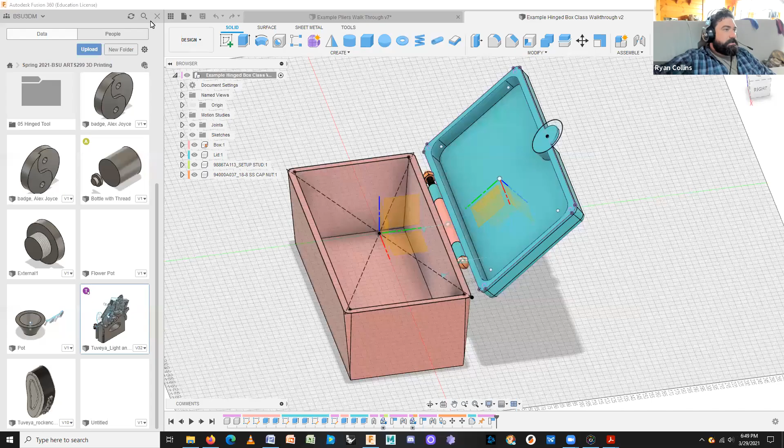Okay, so just to go over our other option for this assignment: a multiple component utility project with a hinge and imported hardware. The other option is making some sort of lidded container. It doesn't specifically have to be a hinged rotating container, nor does it only have to have one lid. You can go willy-nilly with that. But the two parts must be linked together with a joint operation, that could be a rigid joint. You want to play around with the other ones, go nuts. This is the previous example model I have, and I left it in the open position here.

So you can grab the lid, select it, and drag it. Why isn't it letting me do it now? There we are. Click and hold, and you're able to open and close it up to the limit, which I set to 180 degrees.

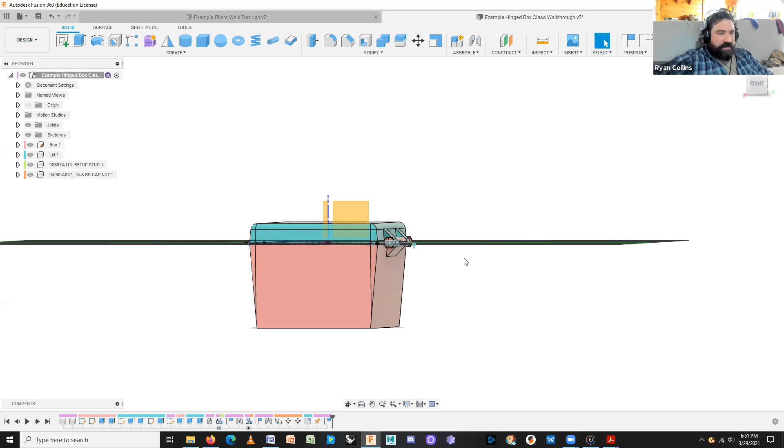Revert position. Now, one of the things I did on this is what we're going to go over: it doesn't just snap together. If I zoom in, I've created a hinge itself on there, which connects with two offset parts. If you look at opening a door in your dorm, apartment, house, whatever, there's some sort of a hinge involved, it's not just connected.

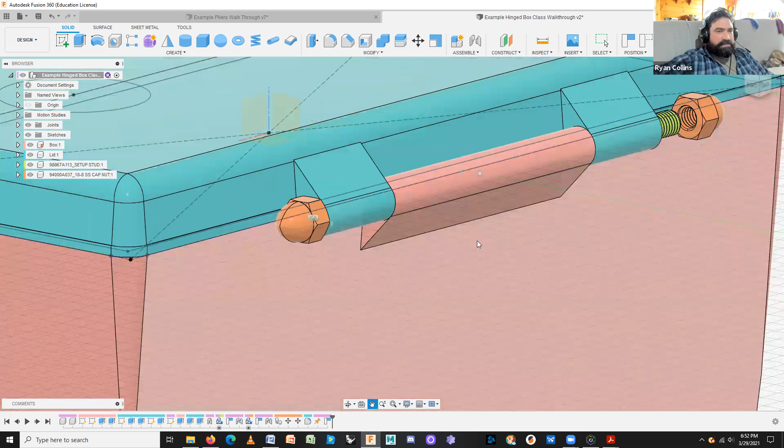And this has a hole through the hinge. Let me hide the two parts. If I zoom in here, it has a hole straight through that I imported a threaded rod from McMaster-Carr. So that threaded rod goes all the way through, and then I imported a couple of nuts on either end. Are these strictly necessary? No. Do they look neat? Yeah.

But I made some modifications to this, like I made this little thumb tab here. I created the top and bottom through Extrude tools, and I added a taper onto that, that's why it has the taper. So I'm going to show you how to model a box, basically it's two boxes, one on top of the other, and how to play around with some of the different features, like adding thumb tabs or things like that, but also how to go about modeling a hinge.

So I'm going to revert that, let that snap back to the open position. And there we are. Hooray for fun stuff. So start a new project, and since we're going to get after this pretty quick, make sure to save it. So, example: hinge lid box.

Now I told you it needs to have a specific dimension, or rather, intentionally contain something. Looking at my desk, we'll say it's a pen holder, works for me. So like we started last class when I was modeling the pair of pliers, I'm going to do the same thing in starting a sketch that will be my reference sketch.

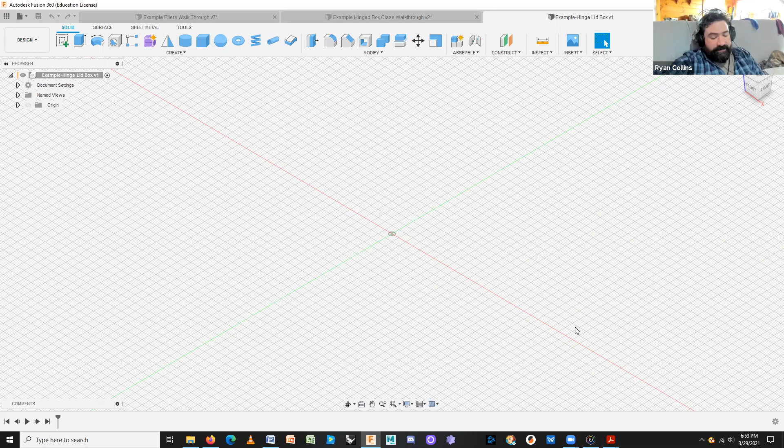So rather than making a sketch itself, I'm just going to make a quick model of a pen, which in this case will simply be a cylinder. This is roughly, alright, 150 millimeters long and roughly 10 millimeters in diameter. Since our workspace right now is still the solids workspace, I can create a cylinder, and I want it to look like it's just laying over, so I'm going to actually use the XZ axis, like the flat wall working in front of me.

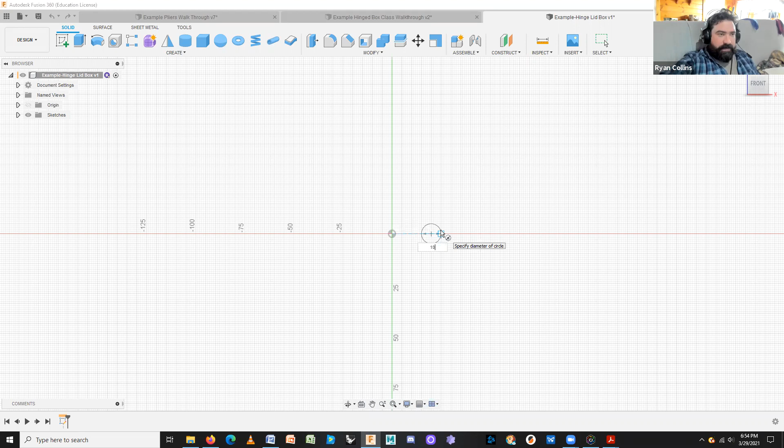To do that, I'm going to move over, and I won't put this right in the center, just move it over somewhere else, making a cylinder. So basically what I'm doing is skipping a step. If I was to make this with circles and then extrude it, I'd get the same effect. So, yep, I want that to be 10 millimeters in diameter, and in length I want it to be 150. This is one of the options for a cylinder, it just makes you go one direction. That's fine. So that's just going to be my reference component or reference object.

I want to have a pen. Now, because I do want it to be, I'm going to be building this in the center, I'm going to move this object to the middle here. So bring up my move tool, select body. Now that's going to give me some weird or strange measurements. I'm just going to drag this over. Now, I can just drag this, kind of eyeball it in place, but I know it's 150 millimeters, so I can just move it.

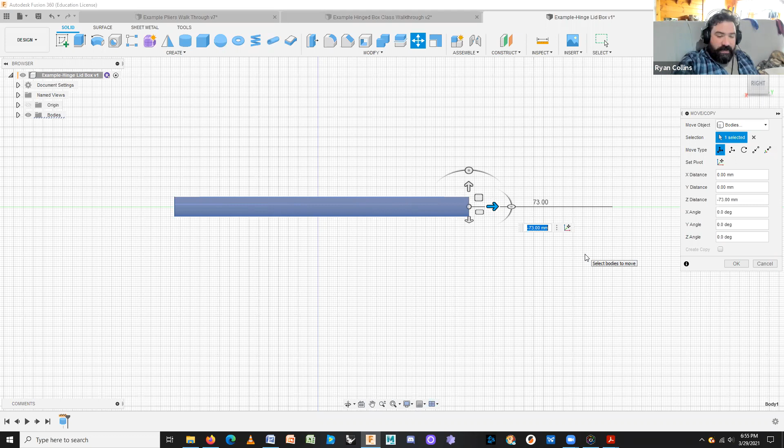Sorry, brain fart on that. 75, negative 75 millimeters, because half of 150 is 75. Now that's more in the middle. Okay, that gives me a reference point, a starting point. Now I can start a sketch.

Working flat down. Ooh, what's going on here? I've got my... there we are. I should have rotated that. That's okay, I'll do that. Let me go ahead and do that real quick.

I like to, just because of my own preferences, work horizontally, like wide in front. So I'm just going to rotate this cylinder, move, set pivot point right in the middle, uncheck, rotate that 90 degrees.

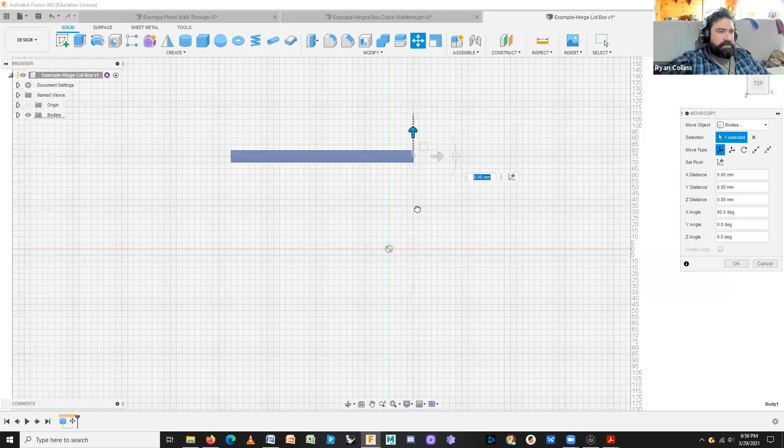What's the problem? That's odd. Why? Okay, sure. That's very strange. Great, now I'm going to get all kinds of lost here. All right, that'll work. Yay, that was strange.

Okay, starting the sketch, and I'm going to start with a center rectangle, right smack in the middle. So I know that it needs to be at least 150 millimeters wide, pardon me, long rather, so let's give ourselves a little extra space. Let's say 200, that seems reasonable, and to at least hold several. Use the tab button, go over to the other dimension, and let's say 50. We'll make it 60 because I don't know why.

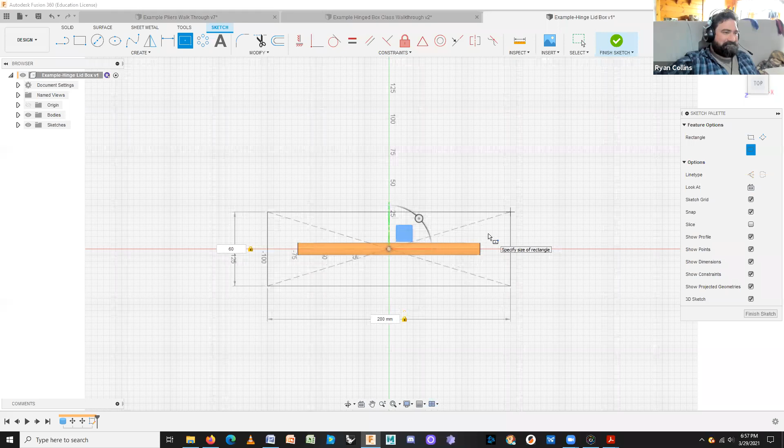Okay, so I'm going to convert this to a construction line. I double click on the profile of the sketch, hit X. Now that is a construction line, and I want to finish the sketch. I just want that as my reference point.

So that I don't trap myself by needing to move sketches to other components or anything like that, I'm going to leave both this kind of reference of a pencil, whatever you please, and my construction line sketch under the main component, just under the main area here. Now I'm going to start a couple of other components.

They're empty, that's fine. Standard component. Activate. Nope, I don't want to activate that when I'm done. We'll say that is the lid. And start another - that will be the bottom.

That just helps to get out in front of starting new components. If you have to start them later, it's not a problem whatsoever. But if you can remember to do it ahead of time, it does help so you don't accidentally get nesting components and things like that, like a few of you run into. Not really a problem for what we're doing, but as models get more complex and you have more components, it can be problematic.

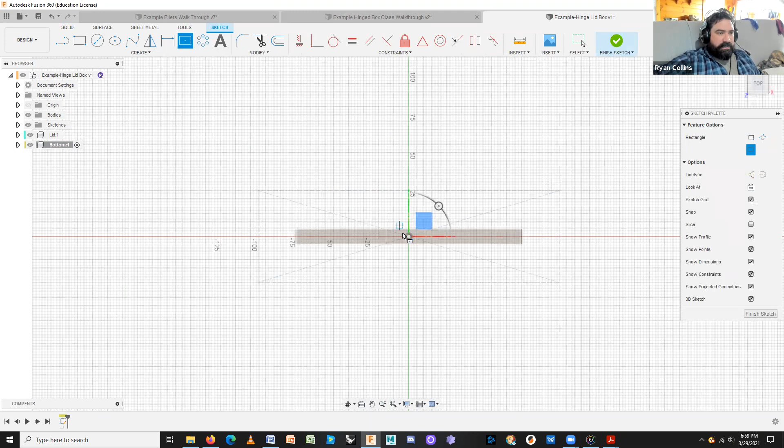Anyway, let's start with the bottom. So we'll activate that component. That ghosts these out, but because they're still visible, I can still interact with them, and that's fine. I want that for now. So I'm going to start a sketch on that plane, center rectangle, and since those construction line sketches are still there, I can use those as references. Now I can just snap to that size. Cool. And I don't want to start another one right now, so hit escape to finish that part.

Now, to make sure that I don't interact with that right now, I'm going to hide the sketches from the original, but I can leave the body there of that pencil reference. Now I'm just going to edit this.

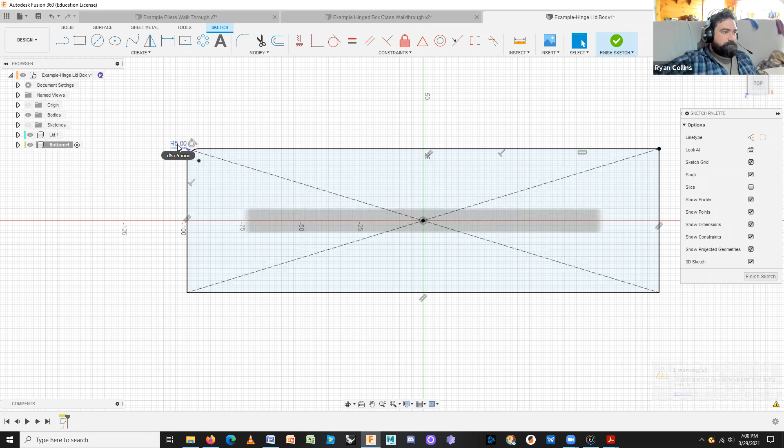So put some fillets because I want to round out the edges a bit. There we are, 15 is rather excessive. Let's say 2, 2 is not quite enough. 5? Sure, 5 works. Now, if I want to link these together, remember, mouse over the radius of that. It is referencing D5. Cool.

If I right-click, I bring up my most used tools, and the top, going straight up, is recently used tool. That's repeat fillet. Do the same. Enter in D5. That's going to link these together. Keep doing that for the others. D5 and... nope, wrong one. Escape.

That one, great. Okay, now I'm going to use the extrude tool to build this box out, but I would like to not have to build a whole nother inset to make the recess.

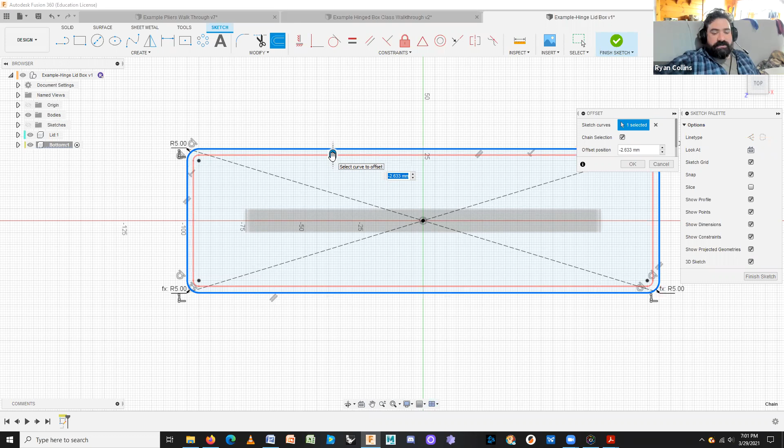So I'm going to use the offset. Select there, move that in a bit. I have found that 3 millimeters tends to be a good wall thickness if you plan on printing an object. So because this is going internal, -3, that works for me. Cool, simple thing there. Can I add features to it later? Absolutely, but for now, I'm going to finish the sketch.

Now, let's make a recess. I'm going to extrude, press E, brings up the extrude tool. Tonight, I do want to go over one of the new functions that has recently been added to Fusion, and that is the thin extrude. We'll go over that in a moment, but for now, I'm just going to do regular extrude.

I want to select both profiles because I want the whole thing to go downward. So how thick was that? How thick were those pencils? About 10 millimeters. We obviously want a little bit more material, so let's go downward. Let's say -20. That seems reasonable.

This is where, if you wanted, this is where I added in the taper. So if you want, give it a small light taper, -5, just boop, brings it in just a little bit. That just created a flat spot there. Now, of course, I did not want the sketches to hide, but it does it anyway, you jerk.

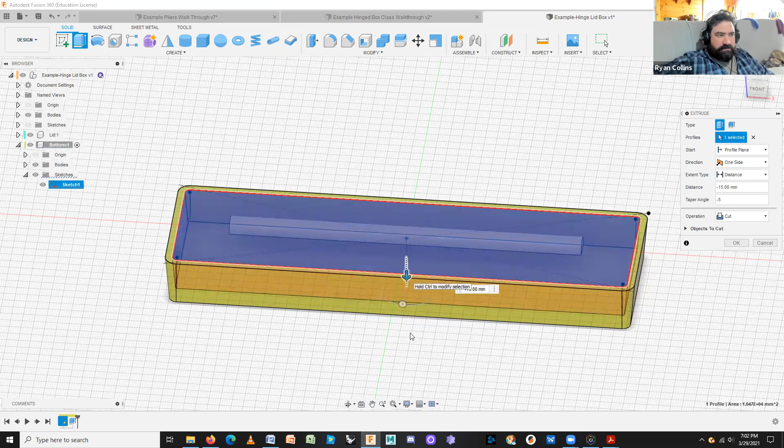All right, now I'm going to use the same extrude tool. Select there, and I want that to go down again. I'm going to match that -5 degree taper. Now, remember, you can drag this selection down manually, or what I like to do to maintain distance is, instead of when you have your selection here, start profile plane. We'll go over this here in a bit. Direction, one-sided. Extent, instead of distance, I want to select to object.

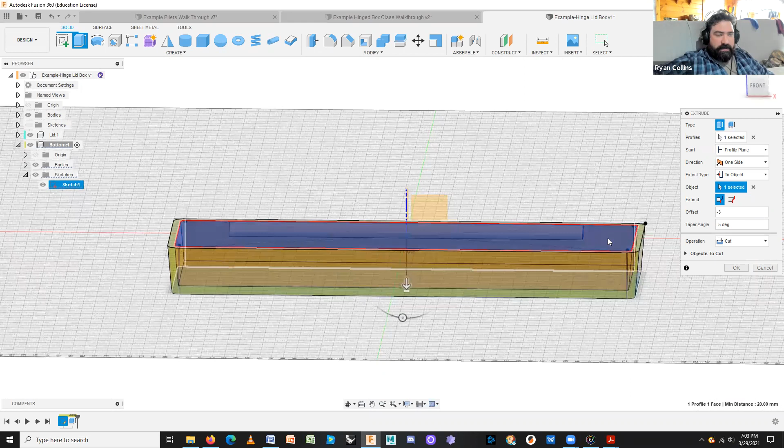Now I'm going to orbit down, select the bottom of my box. That's going to automatically cut straight through. That's okay. The offset allows me to basically back it up a bit, so I'm going to go say -3. There we are. Now the bottom, this recess will always be 3 millimeters away from the bottom. So if I go and change the overall height of this, the original extrusion, that inner extrusion will follow. It's already assumed I want to cut. Yes, I do. Thank you. There we are.

I'm going to do the operation. Now I have a recess here, internal. Cool. Now, one thing I wanted you to note, remember when I said that Fusion will function on anything it sees, so anything that's still visible? Let me reactivate all the components. It chopped my pencil stand-in half because at the time that was visible.

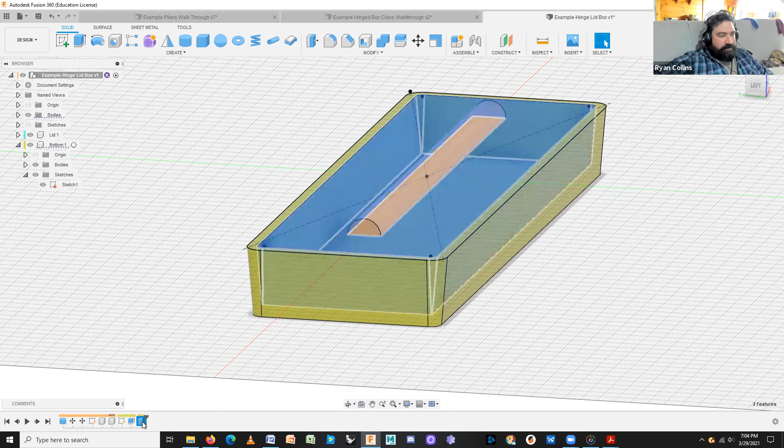So let me go back, edit this feature, and let's see if it'll let me do it this way. Hide that body. Now click OK. Nope, it's still going to operate on it because it saw it at the time. Oh, nope, there it is. So now, since I went back and edited the extrusion and then hid the body of my pencil stand-in, and then finished the extrusion, now it did not chop it in half.

So remember, if you have anything stand-in or anything like that, hide it before you perform an operation if something intersects with that. That is one to always keep in mind. So that's going to be my basic bottom half. Are we going to add features to it? Definitely. But for now, just want to get this part built.

Now, let's start the lid. Activate the lid component. The first ghosts out. Cool. All right. Now, I'm going to start a sketch, and now I'm going to be going upwards. Same, that original work plane. Oops, that is not what I wanted.

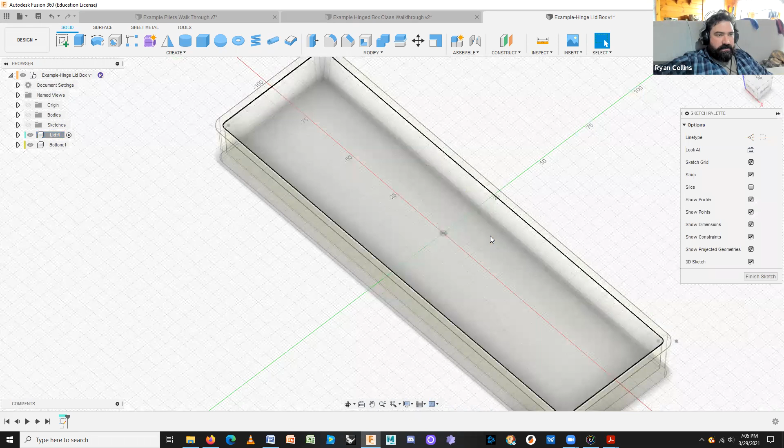I accidentally selected the plane underneath. So let me just delete that. Well, luckily you don't have to delete it, actually. If you right-click on the tool, normally we've been going in Edit Sketch. This next option down is Redefine Sketch Plane. This means you don't have to go back and delete the whole thing just because you clicked the wrong spot. Click here. Plane. And, of course, it hides the origin. There we are. I want that.

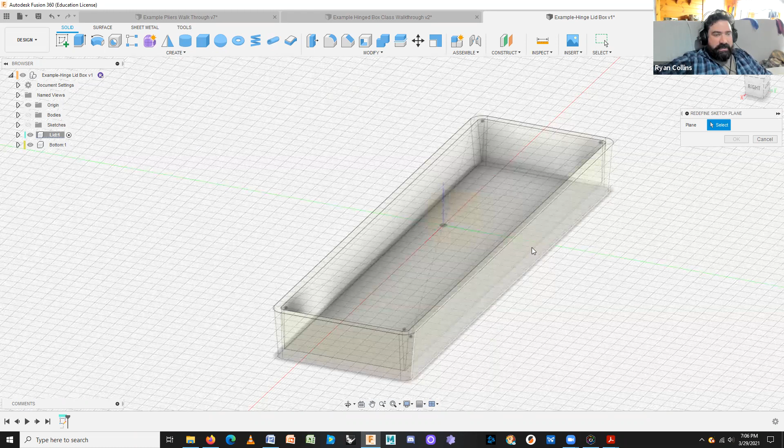If you have difficulty selecting that because your selector keeps trying to grab the object underneath, hide that entirely. You can't really see that I'm selecting this. Select there. Now we got it. That's what I want to work on. Cool. So now when I go and unhide the bottom, now I can go and edit the sketch. Now I'm working on the plane I wanted to, not down at the bottom of the tub.

All right, but what I wanted to show you is how to use the project tool. So far we have not used this. But what this will do is, consider like if you have an overhead projector or you're watching a movie, it's like projected on a wall.

Well, the image gets distorted or whatever onto the wall. Similar issue, similar thing. It can be used a bunch of different ways.

The project tool, press P on your keyboard, brings up project. What this will allow you to do is take profiles. Basically, if you were projecting an image like on an overhead projector of something that's already there, you can project that on a wall and trace that line. This is how to do this digitally, where it takes that object you were looking at and you can select the edge profile and basically pull a copy of that edge profile.

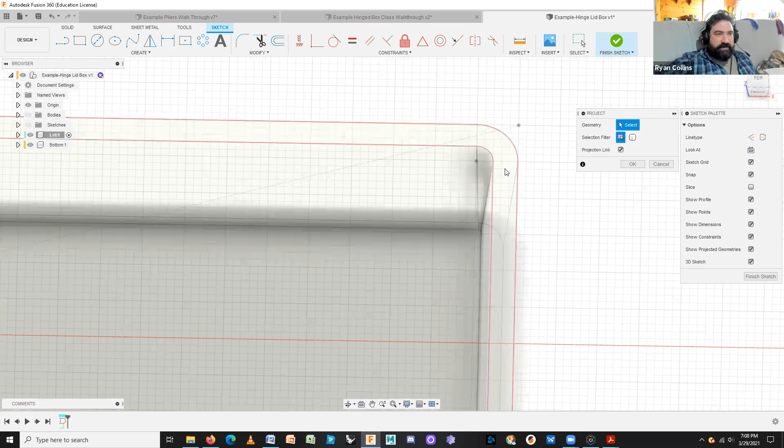With project, I can select, as it says here, geometry. If I wanted just these edges, I could go around and select just the edges themselves. As you mouse over the edge line of the box, selecting those all individually, or if I mouse over that whole plane, that upper lip, I select that. It highlights that, just like if I were going to extrude all of that. Click OK. Now if I hide the bottom, I'm left with this purple line, but it's a copy of the original set of lines. Super convenient tool to use.

And you'll find the easiest way is just press P, or press S for your search tool, and start typing in project.

So from here, now I can make a copy of the lid, or I can make a similar lid. Finish the sketch. This line is all in the new component now too, so I didn't have to copy and paste from the original from the bottom and put it into here.

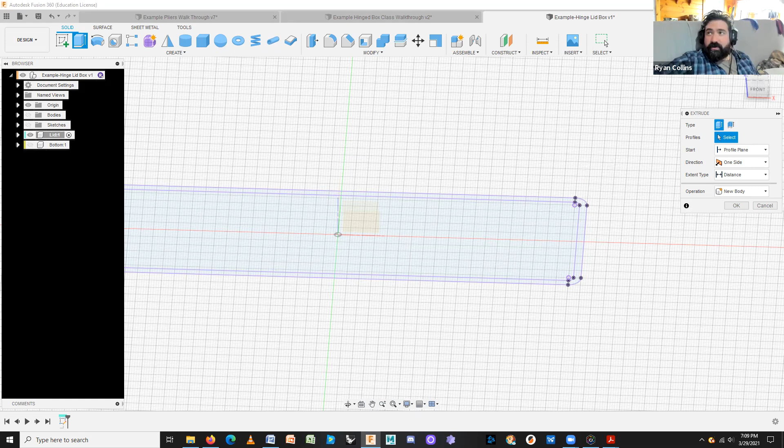Okay, so let's press extrude, E. Let's see here. Profiles. Uh-oh, hang on, my computer's freezing up on me. I probably should close a couple things I'm not using. Okay, computer caught back up.

So now I'm making the lid. I did not have to redraw these profiles, I could just use the project tool. So I can click and drag, or I can enter the top numerically. Sure, 12, that seems reasonable. I'll leave it straight. Click OK.

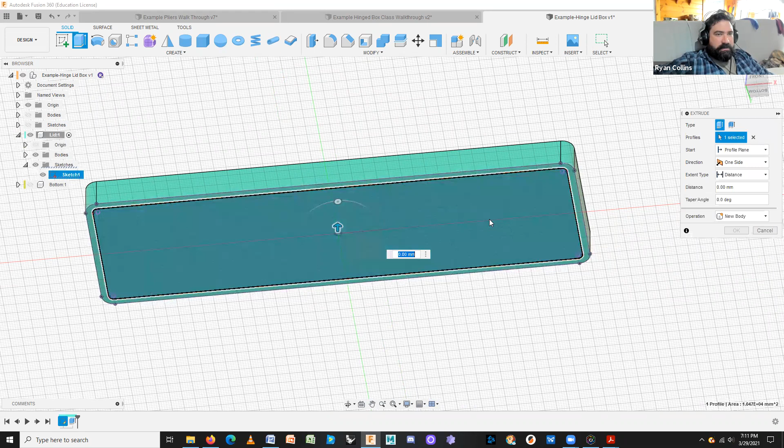So now it hid my sketch, so go back and unhide that projected sketch. There we are. Extrude again inside the profile. And again, because I don't feel like measuring, I can select the extent type to object.

Now select the top and offset of -3, just so it's below. There we are. All right, now I have my recess in there.

Now this is where I could go around and add fillets and things like that, and I'll do that in a minute. We could do all kinds of other fun stuff here too. If I want to add a, well, let's play with this. Fillet, yep, the whole top. There we go, one, that's a nice little round over. Let's say a 2 millimeter round over. Nice, fillet, cool.

So one of the things I was going to play with on this is you can create, remember you can draw on top of the lid here. So this is where if you wanted to, a sketch, actually select the top, rotate that over. I could use the text tool. Yep, on here. Sure, something, something.

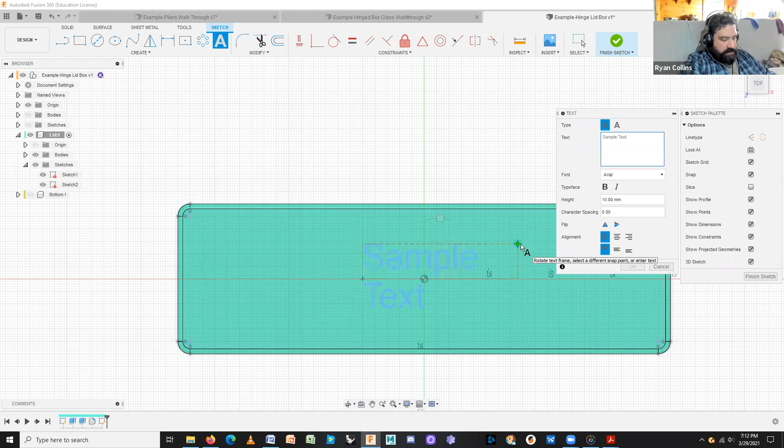And pens, or pen 15. Let's see here, height, yeah, let's make that a little bit larger. Come on. So you can play around with that.

Finish sketch. This is where you could extrude, using the extrude tool. Select that. If you want it to be positive, come up, or let's say -1, not -15. That is definitely problematic, that cuts down in. Now you have a recess there.

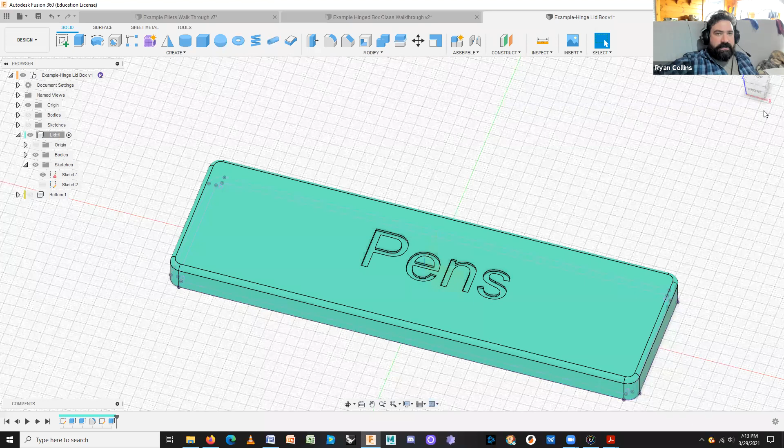So very easy to start adding features and such to this. You can use some of the lines on here as rails. So one of the things I wanted to experiment with is I want to try to create a rounded ridge all the way around the lid here. So what I want to do is create a sketch. Let's see here, I want the sketch actually, geez, that's confusing to try to look at. Let's hide the body there on that plane. Unhide. And what I want is to create a circle aligned onto that.

Right there works. Let's try 2. 1.5, that seems reasonable. Okay, I'm not sure if this will work, but I've been wanting to experiment with this. It moved where I want, no wait, that's on the inside. Dang it.

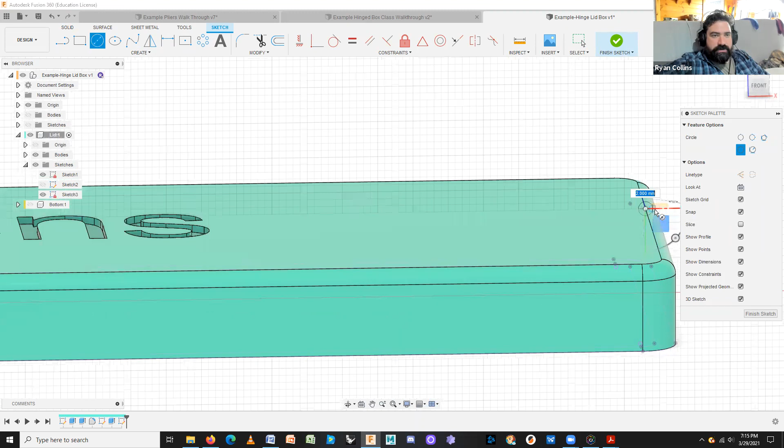Go back and change that. Sorry, one second. Delete you, I wanted that up here. Sure, 2 is fine. Okay, so basically this circle, this profile, is just intersecting that edge line.

But what I want to try is to create a sweep using that profile, but then for the path, I want to use that line.

So let's see if it'll let me select all of these. It should. Make sure chain selection is active. Hang on, yep. So what I'm doing is holding down Shift as I'm selecting, and for some reason it's not letting me select all of them. Well, what that probably means is it's not letting me do all of them for whatever reason.

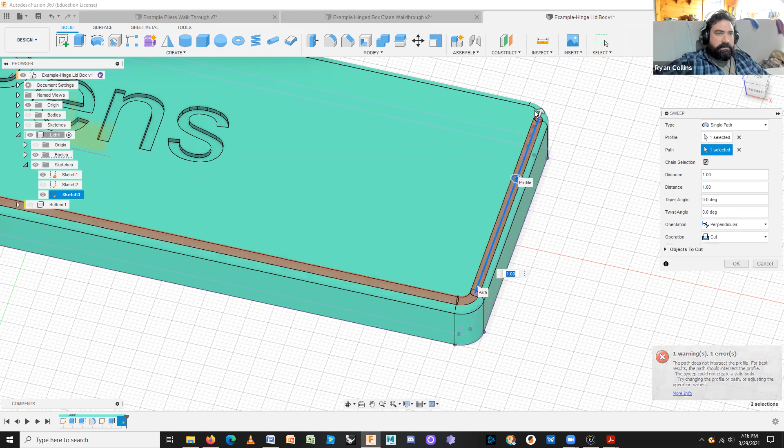All right, I'll probably have to use a project to pull that line out. So I'll cancel that and press project. Oh nope, I have to have a sketch going first. Next sketch, right on top of there. And I want to press project, because project only works during an active sketch.

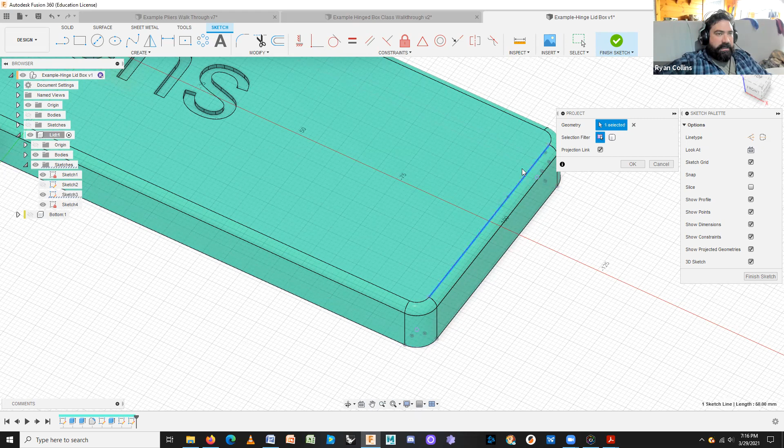So I'm going to double click that edge line, or nope, that's not going to let me do it. So I'll just go around and individually select all of these little edges here, making sure I get all the way around. Okay, there we are, hit OK. Now there's a line there. Great.

So what might be easier is to just hide that body. Now I'm left with a series of sketches, but that's okay. So now I can go under Create, Sweep, select my profile, that circle, and the path. Still not letting me do it. There we go, for some reason it wasn't selecting the whole thing. Okie doke.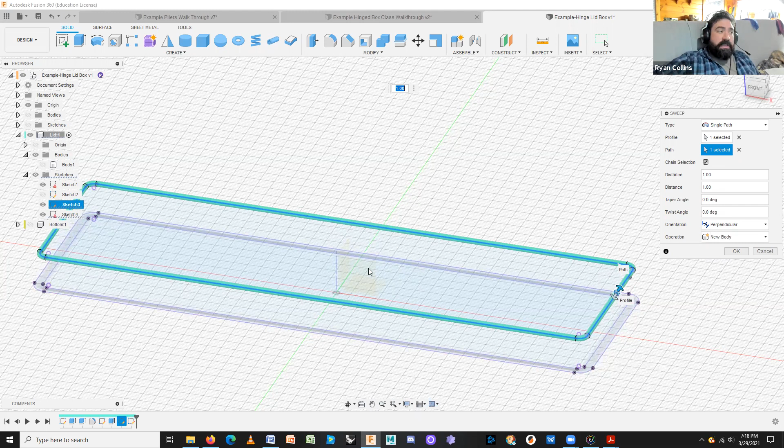Now when I unhide, I want to show you something about the intuitive aspect of Fusion. When I created this sweep, the operation at the bottom of the toolbox automatically goes to new body. However, that's because currently the object it's intersecting with is hidden. If I unhide that body, which is my lid, it automatically swaps to cut because it assumes I want to slice in. I, in fact, want to join instead. Hit OK, and there we go.

Now it's very simple, very subtle, but I just wanted to add that little feature on top. So now there's a little rounded edge to the top of the lid. Not a big deal, just neat. Okay.

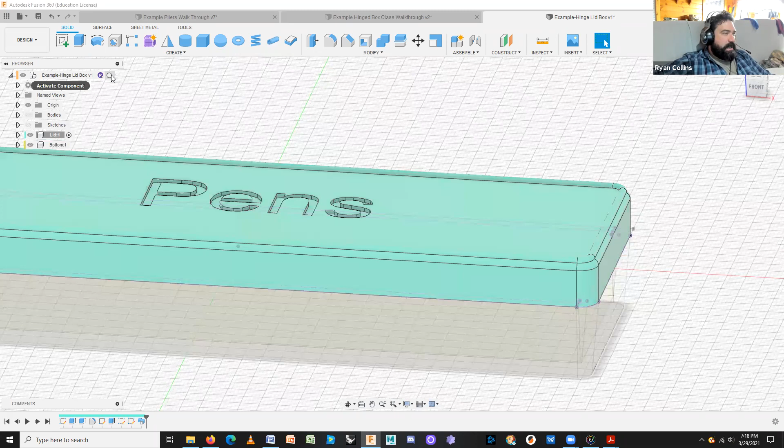So now I have my lid for pens. Let me collapse all of these, unhide the bottom, and go up top and activate all the things. Pardon me. All right, save.

Okay, so next up is making the hinge. Resume recording. Okay, so like I said, top's made, bottom's made. Now we have to make a hinge.

Now your thought might be to first go, all right, we'll make a joint, because the other one we kind of modeled into the pliers. If I hide the bolt and such, well, we had a natural point for the joint because of the hole in the pliers. Well, looking at the previous example of the box, what I'm doing, pardon me, is what we need to do now.

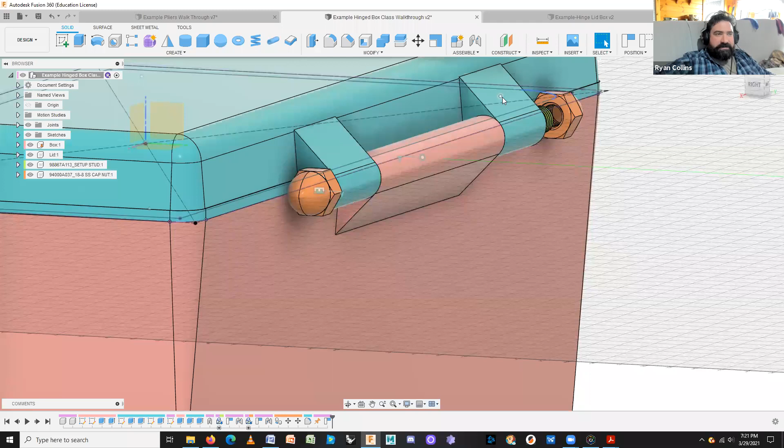Let me close the box. Boop. Now we need to make these little tabs, these little ears on either side. Now, the number of them really doesn't matter. This is the simplest one. I made one large one for the bottom and two smaller ones for the top. Basically, usually the minimum amount of sides for a hinge is 3, just so it balances out.

For our box, we need to make the hinge. So ideally what we're going to do is place a circle somewhere over here, and then we're going to need 2 ear lobes, basically, one for the top, one for the bottom. So a couple things about this.

One, I'm going to draw the sketch not on either side, but I went back up and reactivated on my hierarchy tree the entire project, because I want to add this sketch to my main set of sketches. The same thing I did, at the same place, let me hide the top and bottom, as I set my original reference construction lines, because I'm going to need to share that sketch across both the top and bottom. That's why you want to make sure to draw something that's shared outside of either component.

Is it still something you can use if you accidentally draw a sketch in one component that's needed on the other? Absolutely. You can copy it, paste it, or like I showed you, you can use the project tool and bring that out. We're going to use both of those. So first, I want to draw what is going to be just my general circle.

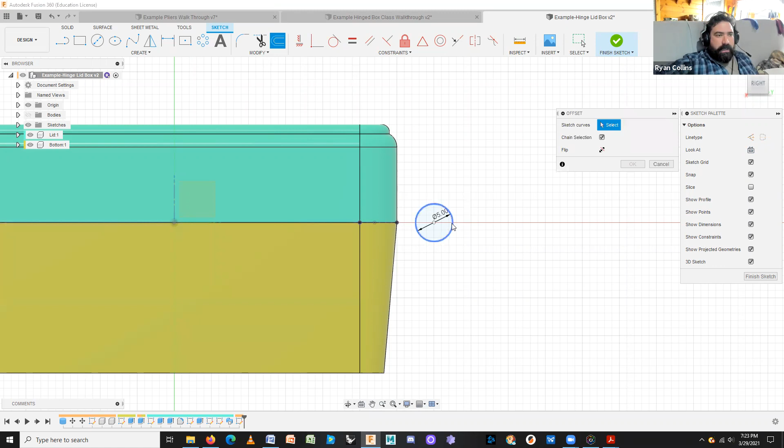Same thing here. I'm going to use the offset tool and offset this circle here, so that if I go in and make a change to the center circle here, meaning, you know what, actually it doesn't need to be 5 millimeters, I can get away with 3, this offset will follow that.

So a good wall thickness, like I said, is 3 millimeters. For this, 3 is probably overkill. Let's look at 2. 1.5? 1.5 seems reasonable. Okay, so now that offset is 1.5 millimeters larger in diameter than the original.

Like I said, if I want to change that, I could go and double click on the original. I can change that to, like I said, 3. Now because I used the offset tool to make the second circle, it follows along.

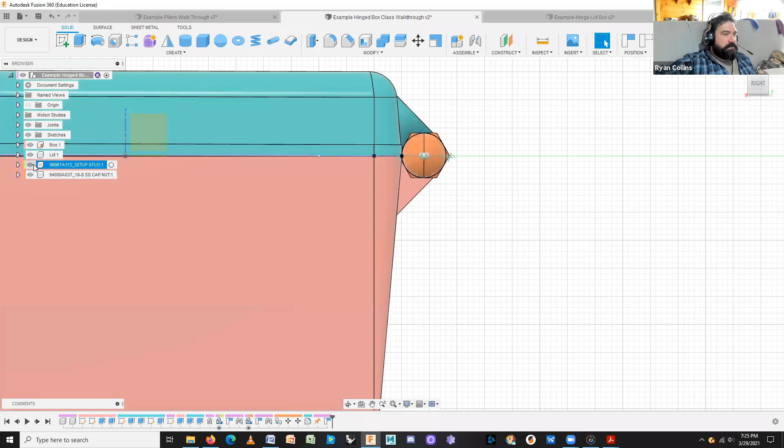Very helpful. Okay, so the next thing, I need to draw some lines. In this case, I'm just going to draw straight lines, but I want them to interact with both the top and the bottom. That's how I made the lobes for here. Let me hide the bolt components and such. So I want a lobe to go to the top, and I want a lobe to go to the bottom.

Well, to do that, what I'm going to do is use the project tool to get a sketch line that I can actually interact with from the top and bottom here. So I'm still under the sketch operation, I'm going to press P on my keyboard. Now I want to select just the edges of this lid and base.

You see how when I mouse over just the edge, it gives me a little line. Want that one and that one. We'll get a part of the curve just for grins, and the bottom. Okay, click OK. We're good there, because now when I hide the top and bottom, I'm left with a line that I can work with. Now I can hide the top and bottom and just focus on this. Or if I needed to hide the top and bottom because I'm going to be doing some cutting or something, it won't slice into that.

Cool. Now, just to move things around, I want to move this circle so it actually interacts with here. Now I can click and drag it, or I can use the, oops, not tangent, sorry, I want them to use a coincident.

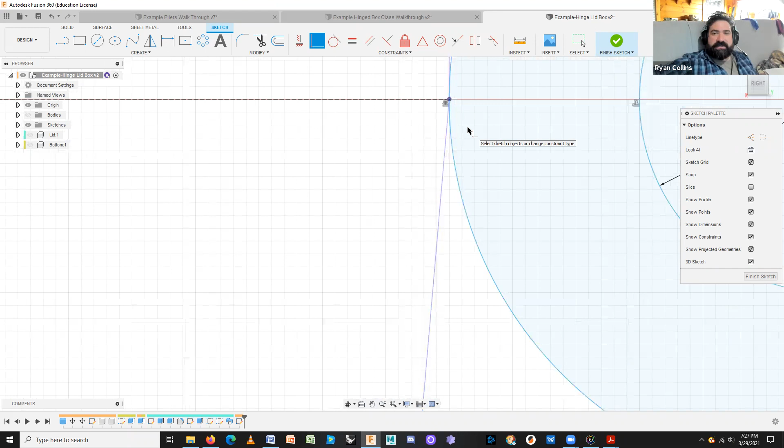So I'm going to select my constraints here, select the circle, and select that line. It snaps that over. Using the coincident means, as you mouse over, constrains 2 points so that they snap together. So I could have dragged that over manually, but why do it manually when there's tools to make sure that they actually properly interact? Now I know perfectly well that if I zoom in, I'm not going to find a weird hidden spot or something because I didn't actually move it all the way over.

Super helpful. Okay, hit escape to get away from that. And what I want to do now is draw up my 2 little lobes.

It doesn't have to be a straight line. I'm going to use line, and I'm going to go up. I'm going to select the circle. Ideally, yes, I want this line to be tangent, but I can fix that with the constraint afterwards. So I'm just going to select somewhere about where I'd like the line to start and draw upward.

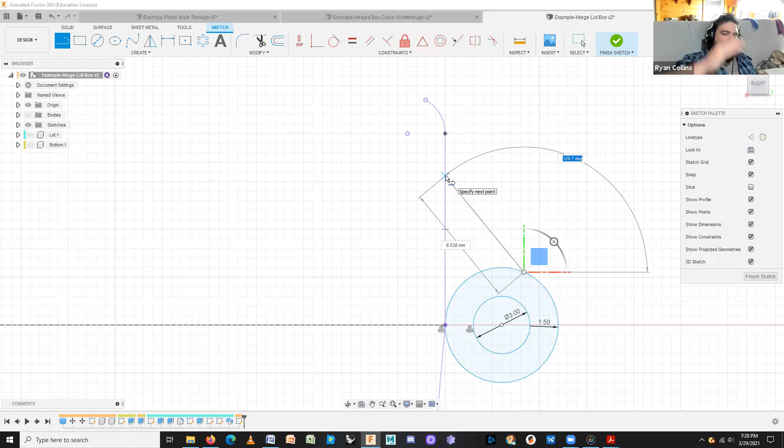Now, as I mouse over the vertical line, my cursor is going to snap to that. I can select either a length if I want to input it manually, or an angle. Just because I feel like it, I want that line to be at a 120-degree angle, for no reason whatsoever. So what that means now is it locks that angle, but where do I want it to go up to? Wherever it meets.

So now I close that profile, and because I had this project line, now you see that this profile here goes light blue—it tells me that it's a complete closed profile.

Now I'm going to select tangent. I want this line to be tangent to that circle. There we go. Well, that 120 angle is definitely going to get me in trouble.

So let's double click that, and let's say 115. Oops, not that—let's say 115. Let's see if I'm going to completely scramble myself here. Nope, go the other way. 130. There we go. Just different ways you can play around with this.

Okay, now let's do the bottom. Start another line, or if you feel like it, you can play around with different tools or different ways of making a line. So let's try a circle, a 3-point circle. Sure.

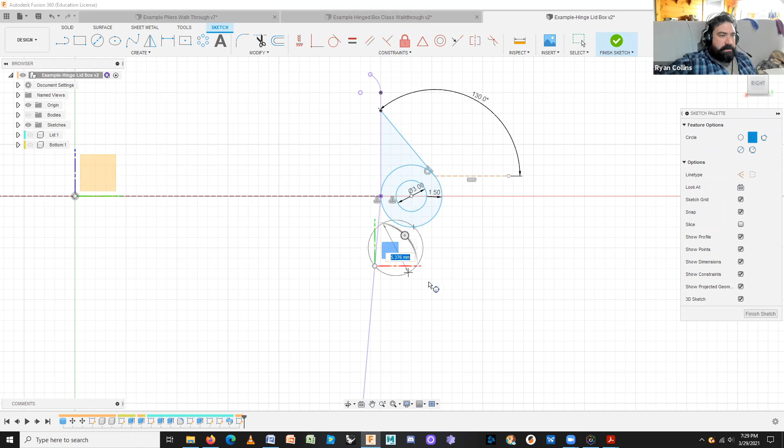The only reason I'm doing this is just to play with making a curved surface underneath. However, like I said, I wanted to actually make that a tangent. Let me escape out of that. There's another option: 2-point tangent circle. I want a circle that creates a tangent to there, and it's not going to let me do it on the curved surface. It has to be a flat surface.

But wait, I can make one. That circle intersects right there. It won't let me do it on a flat surface or on a curved surface. Fine, I'll make my own.

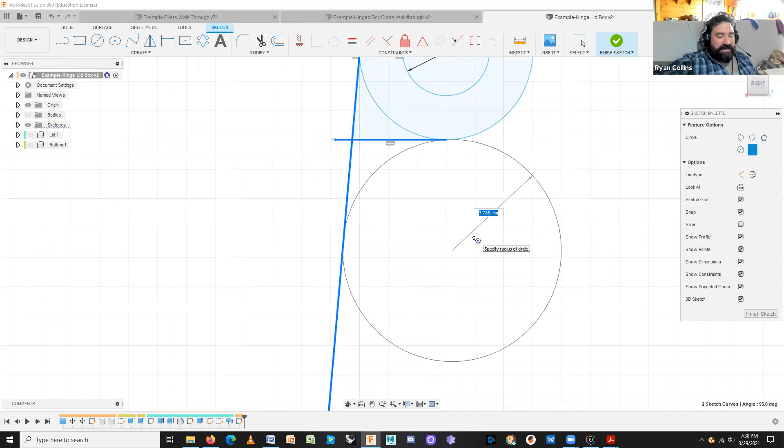There. So I'm just playing around—there's really no rhyme or reason to that. I'll put a number in, 4. Sure, great. Okay, the only reason I'm doing that is so I can trim these elements out.

So I'm going to delete this line here. Now let's see—did it close up? It did not, because my line wasn't quite to the spot. So like I said before, when I was making the line, why I moved this circle over to the line here using the coincident tool is so I can avoid—if I zoom way in here, you can see those will not connect, or they are not connected.

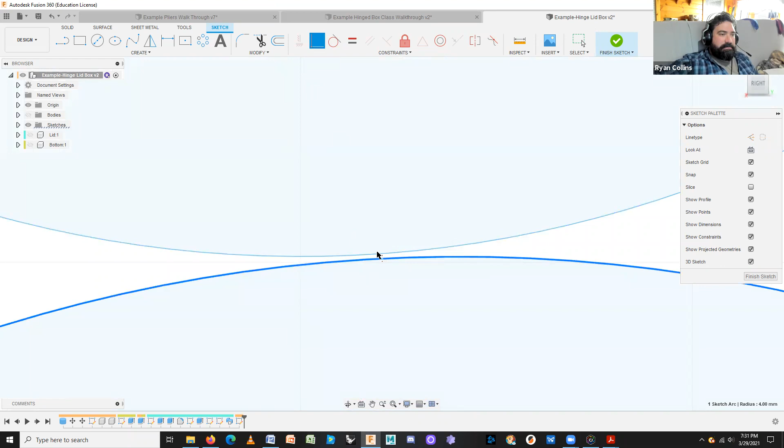Let me try doing the coincident of both of these. And it won't let me. Okay, well fine, jerk. I'll just delete it and do what I should have done from the get-go.

Somewhere on there, somewhere on there, and we'll just make a circle that about fits. Cool, okay, so now I'm going to go through and trim just chunks away. There we are—yes, constraints were removed. That is fine. Hit escape to finish that tool.

All right, so much the same way when we made the pliers, we made overlapping lines that we then trimmed away to make one side and then the other—doing the same thing here. This is essentially the exact same thing. I have what will become my center circle, and then I have the side that will become my lobe on the top, and the side that will become my lobe on the bottom.

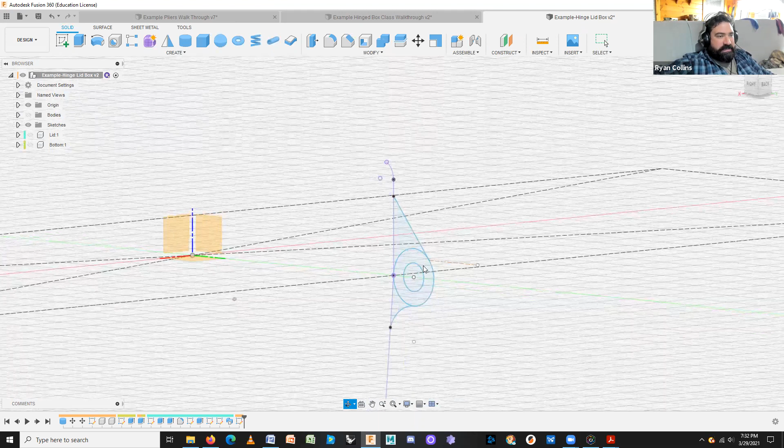I'm going to finish this sketch. Now I have that sketch floating in space. I'm going to unhide the bottom and top. It gets a little confusing visually, but you can see now how those elements share sides on here.

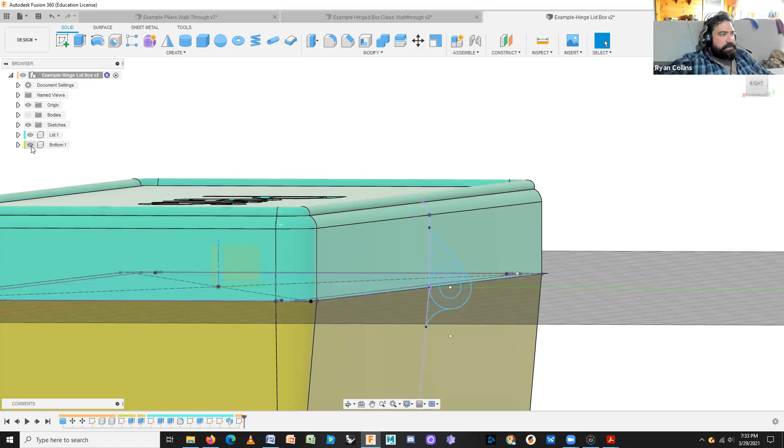Okay, so now I want to create the lobes for the top and for the bottom. To do this, now I want to activate whichever one I want to work on. Again, the reason I made the sketch on the main set of components, not on any individual one, is so I can access it from either side. So just to make this less confusing, I'm going to hide one side at a time. All right, so I'm going to work on the top here.

So what I'm going to do is press extrude. I'm going to select that center circle. I don't want to select the inner circle because I want to leave that hollow. And I'm going to select the top lobe.

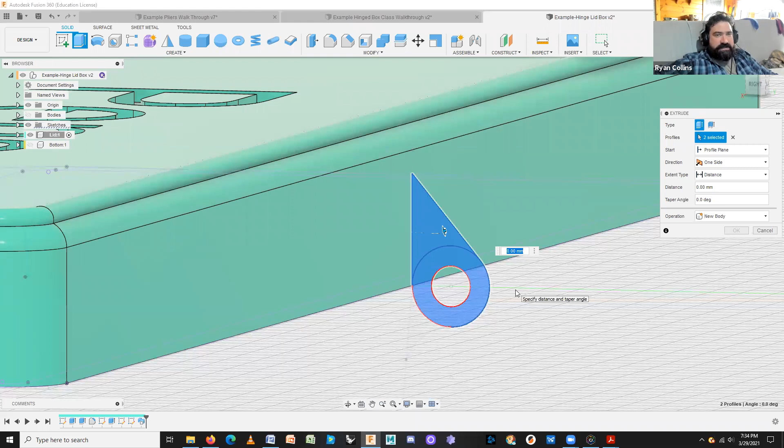Oops, I skipped a step, my mistake. I meant to activate the lid component only. There we are, my mistake. Make sure you have the side you are working on, that component activated, so that it's all on the same component. Okay, so I have this profile.

Now I can drag it out one way and see, now it's automatically joining because it's all in the same component, because I have the active component of the lid, well, active, but I'm pulling from a sketch that is on a shared sketch.

I want this to go in opposite directions at the same time, so under direction I'm going to select symmetric. Now when I pull this outward, it grows equally in opposite directions. Let's say 20, I'm just picking something at random. 20 seems reasonable, probably very much overkill, but that's large enough. Okay, click join.

That is now bonded to and part of the lid. Great. Unhide the bottom. Well, great, but that sketch, and of course it hides it automatically, that sketch is smack in the middle here. How do you make these lobes start way out here?

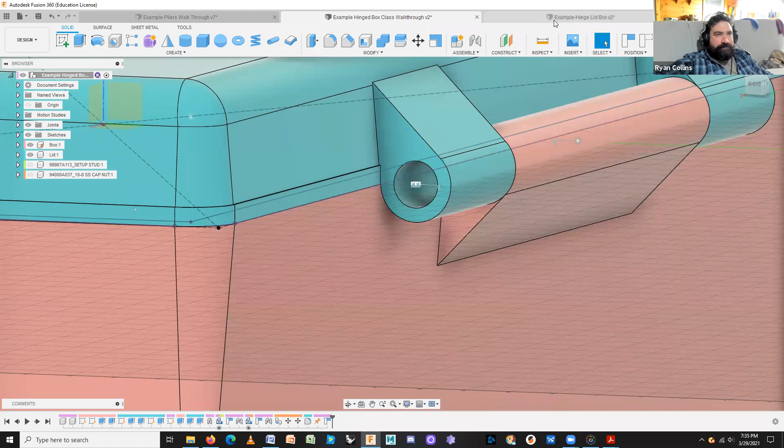This is where the other option on extrude comes in. Press extrude. Now I want to make sure, or actually you should have done this first, but make sure to activate the bottom. I am not hiding the top yet, but unless I do I can't access it properly. But now I'm going to select, if I reach in here, or if you're not being able to select it, temporarily hide the top and select your circle and the bottom lobe.

But you have to have the other component visible for this, because what I'm going to do, so far we have only been working straight from an extrusion's existing plane, straight from the plane that the sketch already exists on. The first drop-down option on extrude in the toolbox says start. This is where it's starting from, hence start.

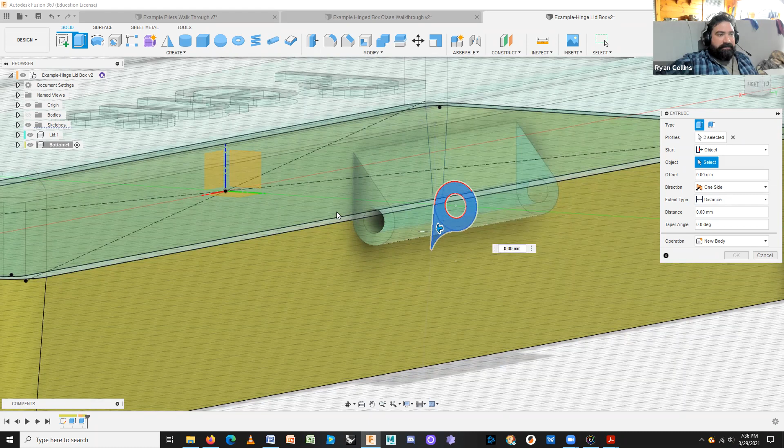You have other options. You have offset, which will allow you to start from an offset construction plane, like we used for creating a loft. But the last option is object. If I select object, and even though it's not active, the lid object is still visible, I mouse over this surface, click there. Now my extrusion of this profile, the profile for the bottom lid, will start on this plane. As I extrude outward, it starts right there.

Super cool, we'll say 15, that seems reasonable. Now the only drawback is you cannot do both of these at the same time, so you have to do two separate operations. My operation, join, super good.

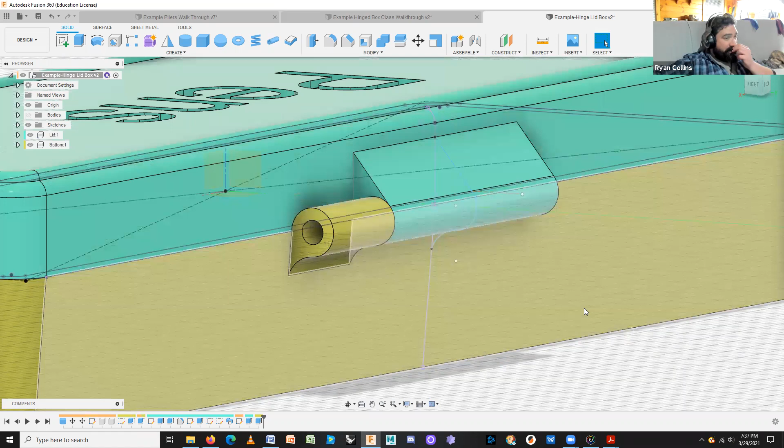Okay. Now it created that element, joined it already, but it started where the other piece ended. Orbit around, do the same thing on that side. Do another extrusion, see if it'll let me select in there. Yep, that side and that side.

Start from object, select the other side, and drag it out. Or 15. Well, I want to make sure it's negative because we're going the opposite direction. Oops. Because I selected that, it automatically assumed I was working on the wrong component. Double check that it didn't automatically switch components on you.

Because when you go to join, it was trying to add it to the top one. There we are, there we are. But remember, that's always reversible. Click OK. I said click OK. All righty.

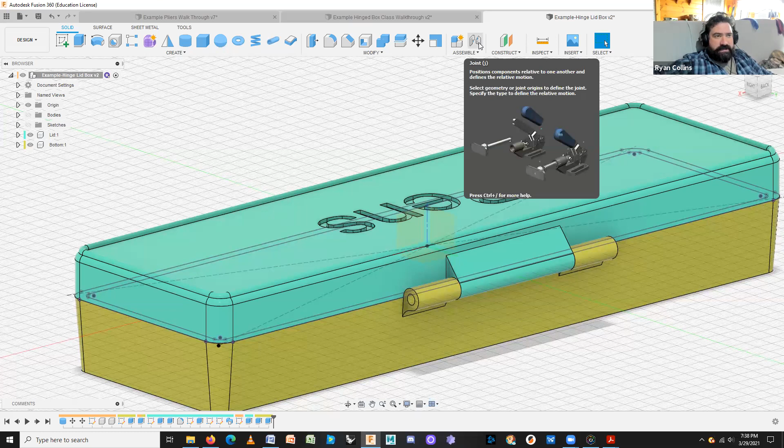There we are. I hide the sketches so it's a little bit easier to see what I'm doing. There we go. So now I have a hinge joint from opposite sides there. Great, well, I have the parts of a hinge joint. Now I need to actually attach the digital joint. All righty.

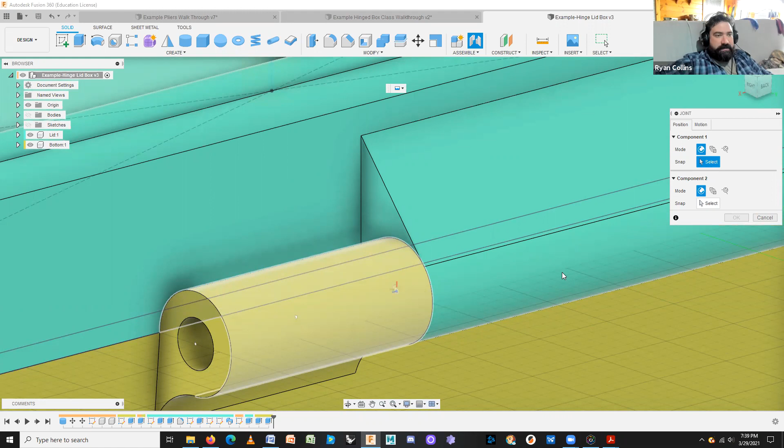It's the other end of that cylinder. I want this in the center of the lid cylinder. I kind of left the cursor about where it was, and I do mean about. Fusion assumes that you are still trying to find the center of that space, and the triangle appears there. Remember that the top selection moves to the second. But in this case, it's not snapping anywhere else. I'm going to be rotating, so select there. It hides the top, and my point is actually the exact same point.

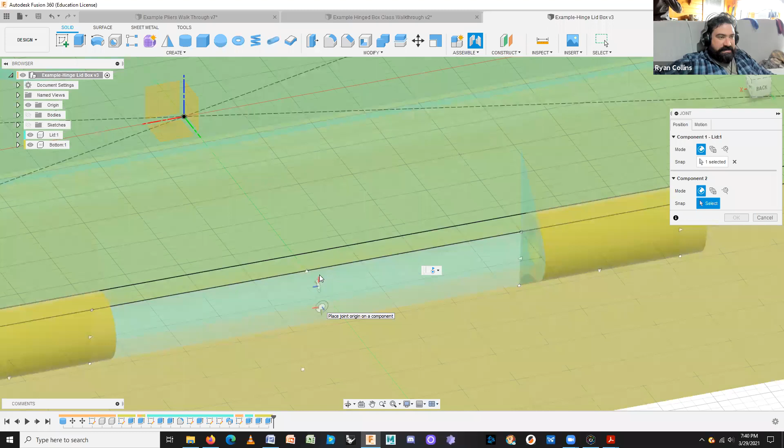So sometimes that does cause problems if I'm trying to select there. Let's see if it's going to let me do this. Let's try switching the motion first. I'm going to go to revolute, position. Yeah, it's still wanting to place there. So the problem here is it's not wanting to let me select the exact same spot, even though they share the same spot.

So I'm going to show you how to work around this problem. Realistically, what I probably could have done was just made the joint over here, and it wouldn't have made any difference. But we're going to solve the problem that we're faced with. So one of the other options on your selection tools under component 2 is mode, simple mode. It allows you to just simply join or select what's in front of you, reasonably simple things.

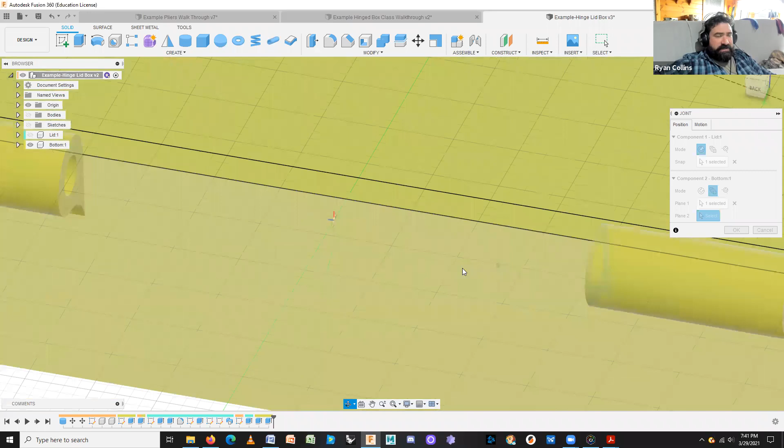The next option is between two faces. This is when you're trying to create basically a hinge point, a joint between objects that don't yet exist, or you want them to rotate around themselves in space. So I'm going to select that one. And let me hide the lid so it's a little bit easier to see what I'm doing here. I'm going to create a joint evenly between these planes. So it says plane, select there. Which one I'm selecting first doesn't matter. And select there. And it's letting me create a joint in between here, the snap.

See if it's going to let me do this. It's still not wanting to let me select right there. That is fairly infuriating, because that is now rotating way off center. That is problematic. So let's try to reselect the snap here. No, still doing all kinds of weirdness. All right, fine. Be that way.

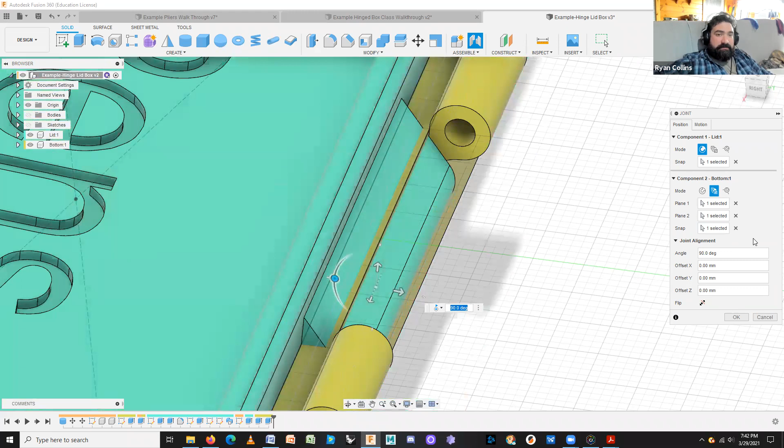Then we'll go back and do what I said before. So what I'm going to do, because the lid and the bottom share faces, is hide the bottom, and I'm just going to create the joint here on the side. Now I'm going to unhide the bottom and hide the top. And because these are two separate faces, this is why it's letting me select it this way.

Smack in the middle. Now I want to make sure I'm not letting it select that tube. So I'm going to mouse over this face. I don't know why it's trying to select that tube. So mouse over this face, press and hold control, just like we did for the bolts on the pliers. And it lets me snap there. Unhide the lid. And that let me select it that way this time.

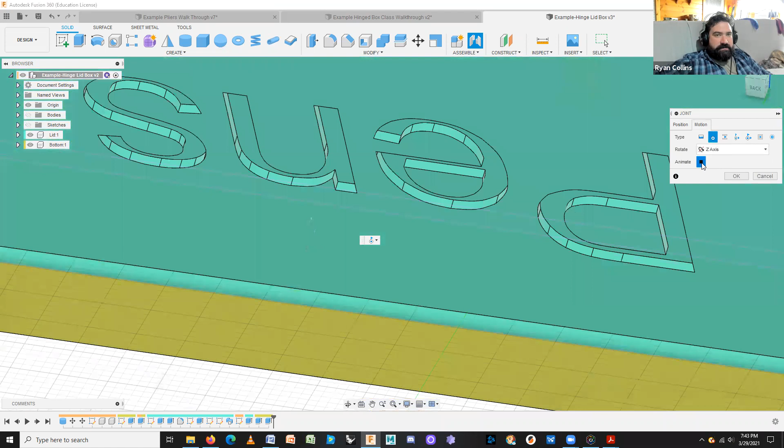All right. Check my rotation around the Z-axis. Super good. Now I have a hinge joint built in place. We'll set the limits in a moment. Click OK. All right, workarounds for any problem, hopefully.

All right, so let's go and set this joint here. I want to set the minimum and maximum. You can do this numerically, or you can do this by hand. If you zoom in, you see the little flags. You've already kind of played around with this when making the bottles, the lofted bottles. So what I'm going to do is grab one of the flags and move this around.

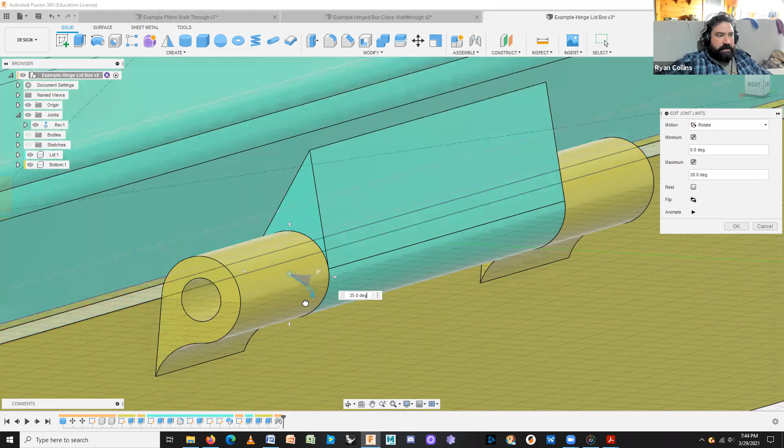Now, I don't want that. I don't want the first one to move from there. So I'm actually going to grab the second one, rotate that, I don't know, 120 degrees. That's fine. But you can also do this numerically if you accidentally grab the wrong flag. Because the minimum, I want it to be 0, so it closes. And I can hit animate just to check. And there we go.

The rest is so you can set like a pause in there. But there we are, okay.

Now don't forget to ground the object that doesn't move. In this case, it's the bottom. So right-click on the hierarchy tree, and it's the second option from the top, ground. That locks it in place.

So now when I grab like a face or something on the lid, it doesn't move both objects, just moves the one that you intend to move. All right, click save. There we are. And then from here, activate the whole component, which already is.

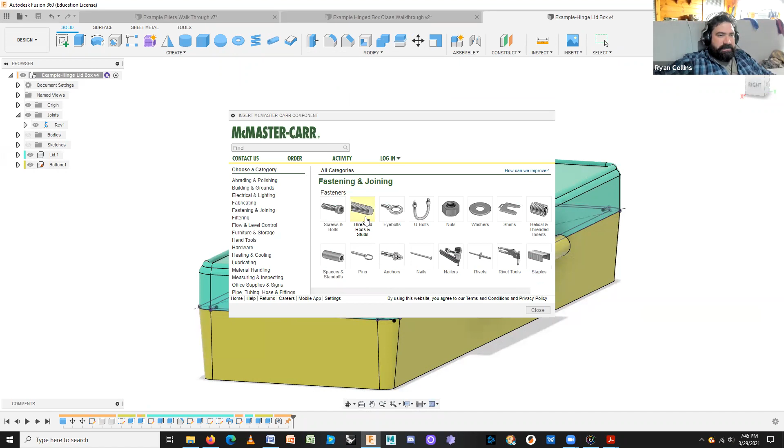And we're going to insert from McMaster-Carr some parts. In this case, I'll just use threaded rod because I'm going to do just like I did for the other metric one. And that was M3.

Now, one quick thing, don't forget, you should probably measure the distance there. So inspect from that face to that face, and that is 70 millimeters. Cool, okay, I forgot to do that first.

So go back to McMaster-Carr. It doesn't save your last position, unfortunately. So 3 millimeter, M3 millimeter rod, great. They have 75, cool, that will work.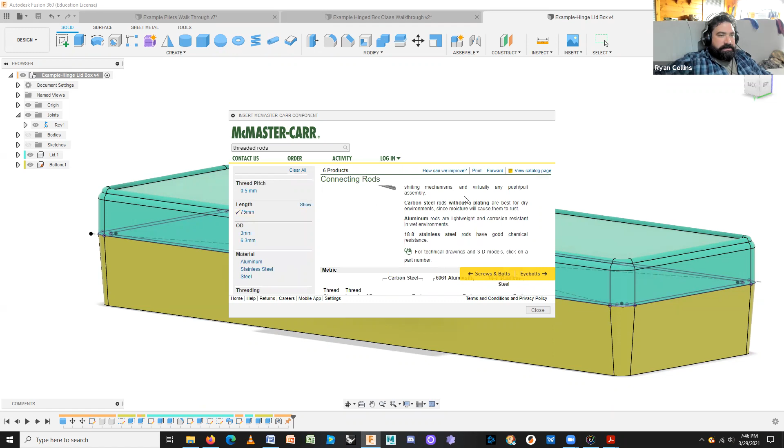Connecting rods. So remember how to get your parts in. For connecting rod, you go to the actual object. These are just different ones. If you look above it, it's just saying carbon steel - this is just the material it's actually made from. Stainless steel's pretty, we'll use stainless. You select the SKU number there.

Go to product detail. Now it will tell you, because this is where it'll show you like the actual layout of it, the drawing. And you can go to your CAD selection. There's not one for Fusion specifically, we are using the one that says 3D SAT. Download, and it drops it immediately into your project.

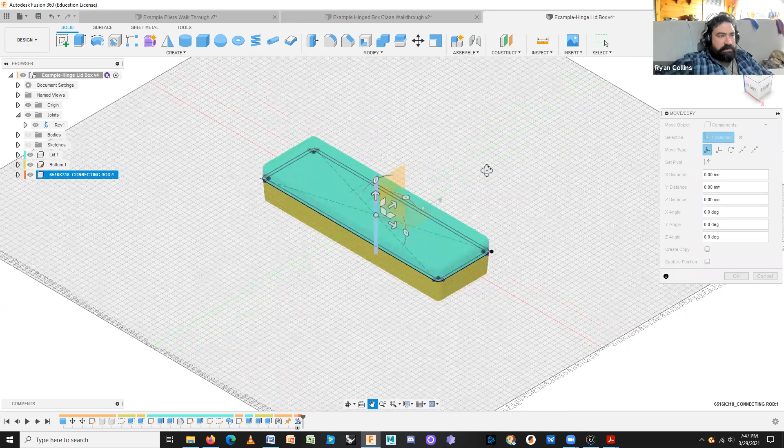There we are, okay, so now I do want to actually put this into position. So I'll drag this over, rotate this rod where it's roughly in position. That would be 90 degrees, genius. Pardon me.

And capture position, sure, cool. Now you could try to drag that into position manually, but again, why not let the program do it for you?

I'm going to use joint. Remember, the first thing you select, or the first selection, is what moves. The second selection snaps it into place. So I want right smack in the middle.

Again, the new selection options on Fusion really help out. I hover roughly in the center. Bam, it lets me select right in the middle.

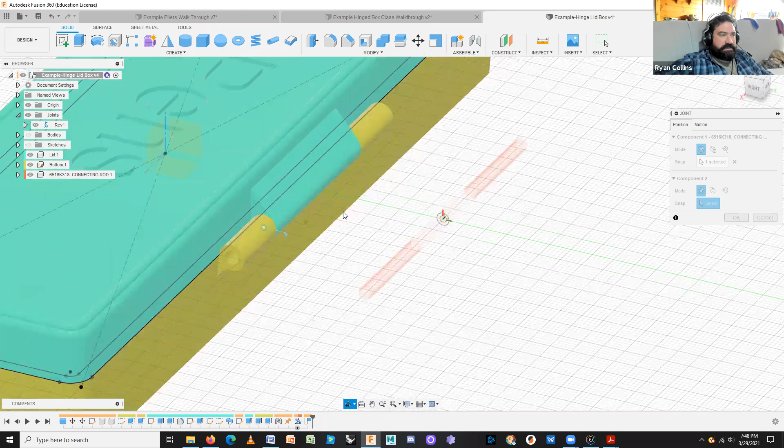Awesome, second selection - like we tried to do the first time around, I'm going to hover over where that internal tube is, and let's orbit over just to make sure it's actually selecting that. Should be, yep, right in the center.

Well, hang on, that looks like it's selecting. Yeah, that is not the center. Move over a little bit more.

So if it's not quite finding it, hover over the next available option. I want it in the center of that hole, or that tube, but moving inwards. All right, hang on, I'm not finding it at all.

Oops, I wanted it on the lid. Let's see here, it is not finding it, is it?

There we are. So now when I mouse over this cylinder, the hollow one, now you can see that, alright, fine. So just like before, when you're trying to select the floating space in the center here, hold control. I'm going to mouse over the internal tube, just that internal space, press and hold control. Now it locks my selection inside that empty cylinder, and it's allowing me to select there.

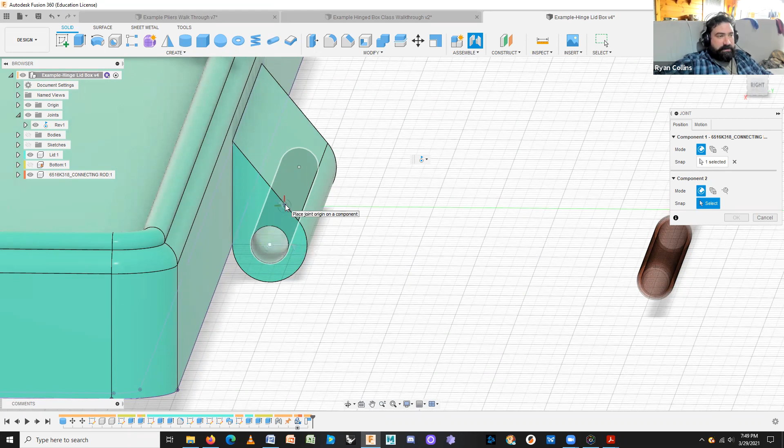Snaps over in place. I do not want that to rotate, so I'm going to select a rigid joint - this is where rigid comes in handy. There we go, that is now appropriately located exactly where it needs to be.

There we are, unhide. And now I can go and bring in some nuts.

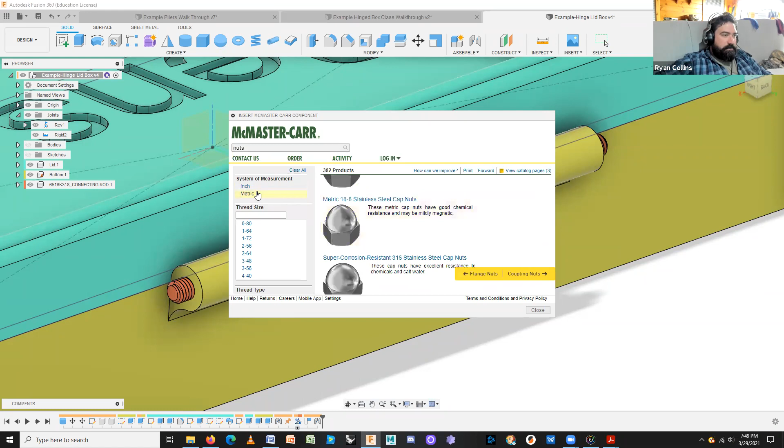So insert, McMaster-Carr again. Come on - oh, now you're going to stay where it was? No, alright. Nuts, and yeah, cap nuts are pretty. I want metric, I want M3.

And now you can just select - it doesn't really matter for this case, but you're just selecting the actual material for these. So yeah, sure, still stainless. Hooray, go to the SKU number, product detail.

It does save your last selection, so it should stay defaulted to the SAT file type. Download.

Okay, same deal, drag it. You do want this to be in the relative orientation, at least, just like with the steel or with the rod. So let's move that 90 degrees. Boop-a-doop-a-doo, great, capture position automatically, click OK.

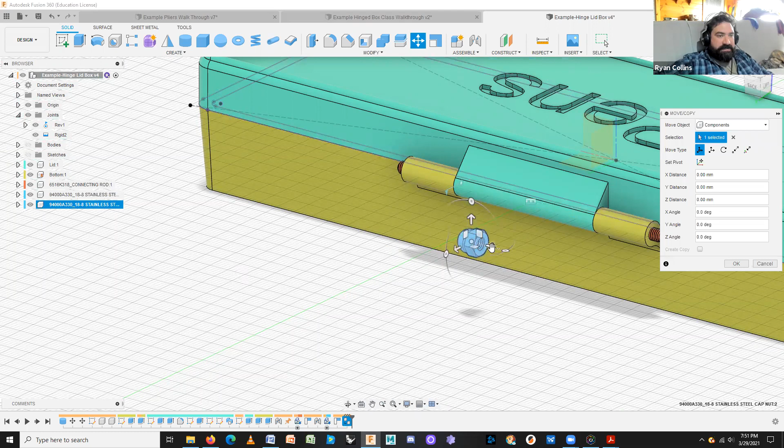All right, now I'm going to do it again, but before I do this, I want to cap on either side. So what I'm going to do is select this component and Control C, Control V. It dropped a second one in. I'm going to move that over because I want the second one automatically, but I want it oriented correctly, so move that 180 degrees.

Great, now we've got them already put in position. And because it was a copy of the same, these are going to be the same automatic component color.

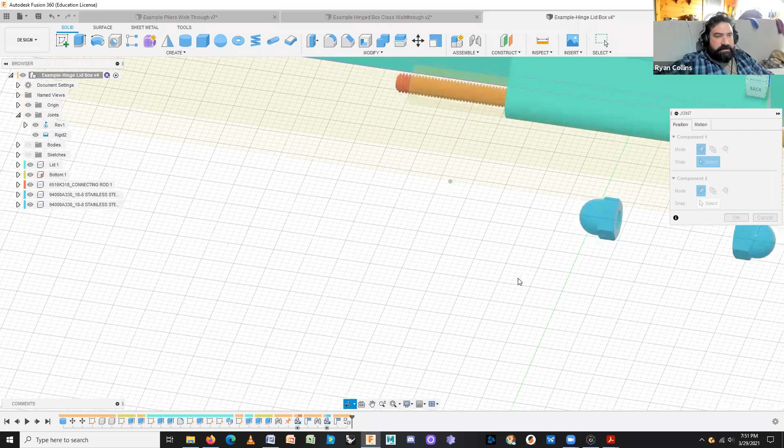All right, joint, select here. Now, how do you make a selection for this part? Fair question. What I'm going to want is to actually locate the surface of this nut. So I'm going to mouse over the bottom there, click and hold Control, and now I can snap right there.

Now, I don't want to have to deal with this threaded rod. It's going to be the same space, but it's not like it's actually threading on there, so I'm going to hide that threaded rod. But now I can mouse over the face of this hinge lobe, press and hold Control, now I can snap to there. Pew, plop, great. Motion - yeah, it's a rigid joint. That's perfectly fine, click OK.

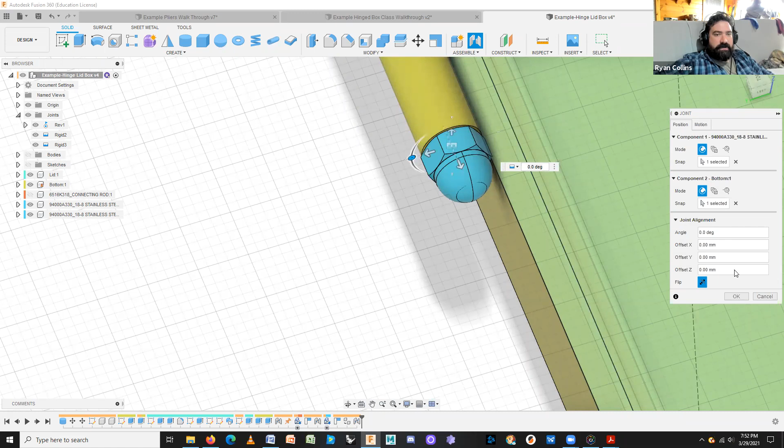Do the same for the other side. Joint. Mouse over face, hold Control, grab the center there. It ghosts out. Mouse over the face here, click and hold Control, grab the center, plop - snaps it in place. It is a rigid joint. We are good, great, okay.

Unhide the threaded rod, and there we are. So that is how you can bring in the parts and snap them all in place. When I go to move the lid, you see that the nuts stay put.

No, you can't see it because it's obscured. There we are. So those nuts stay put, the threaded rod is in there. There we are. So now, obviously, you would go about and actually model like a pen or something.

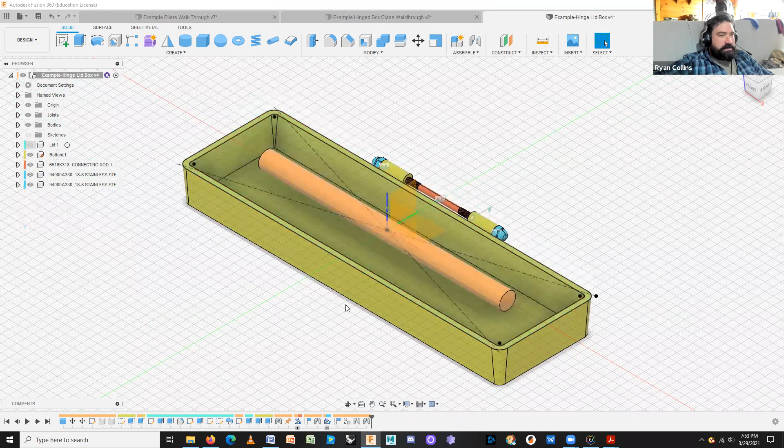So I had that original little body in there. Let me hide the lid. So I could actually model a couple of pens and such, drop those in, and there we are. So that is my threaded lid. So one of the things I was going to try to show you all, and I want to show you a little example of the new option on Extrude.

So what I'm going to do here, I press Extrude. The new option is Thin Extrude. Basically what this does - you can mouse over it and it shows you - it extrudes a thinner wall. So select this, and I'll show you an example of this, because what I want to try and do is create like a little internal lip so that those two halves are not just meeting flat, but there's a little bit of an interlock to them.

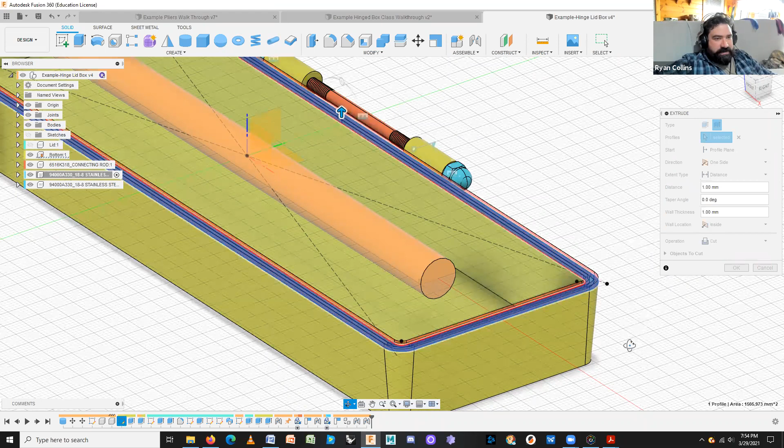So I'm going to select that upper profile, and I'll just drag up like 1 millimeter, and I'll show you what happens here. This lets you extrude a little channel inside. Really cool option, and that's exactly what it's for, being able to do stuff like this.

Now, I'll need to play around with this a bit to actually get it to work properly. But this is how you could create things like gaskets. So if I wanted to put like a little ridge in this, that is how you could create a gasket, or how you could make two interlocking lips, things like that.

You can choose the wall location. Outside - that's not useful at all. Oops, center. I would actually want that to join. So you can see how that works, or at least start to.

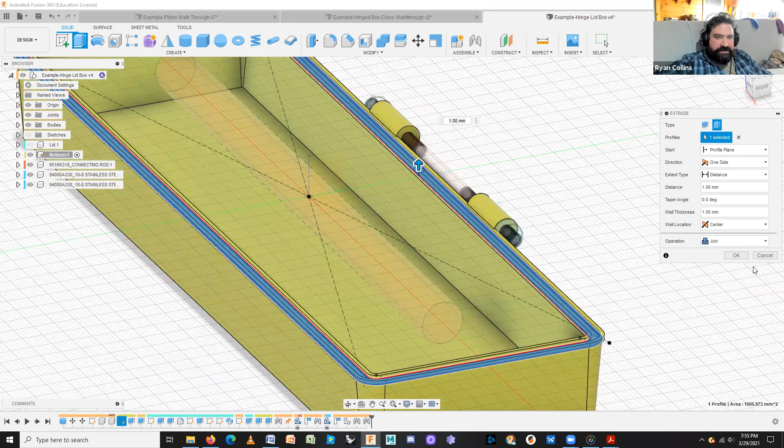We're running a little bit long, so I'm not going to go into the full detail of this, but this is a really cool option to play around with. We'll just cancel this for now, because it's going to take a little bit more modeling, and that's certainly not a necessary part - it's just one more thing that you can play around with.

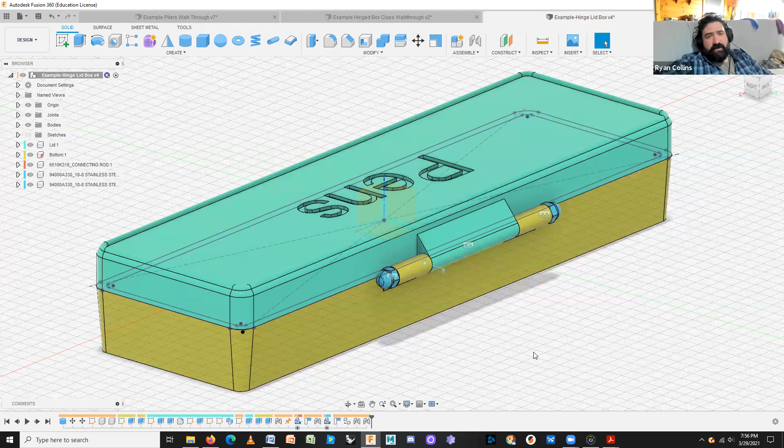Yeah, so play around with some little flourishes, definitely add little details. Make a container if that's what you want, or you can continue to work with your pliers until that is fully modeled. But make sure that you have your hardware - oops, that's the original hardware I pulled in, and it is way too big. Make sure they are connected in place with joints. So all the more reason, like when I was working on this one, to use joints to automatically snap them in place rather than trying to manually put them in place and then add the joint for the hinge. But play around.